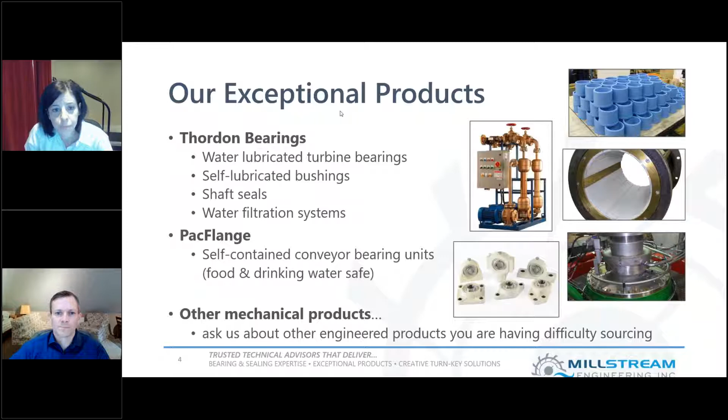Aside from the products we offer, we can also provide different types of engineering support and services to our customers. We are bearing and seal troubleshooting experts, and we love to solve challenging problems. For example, we can help customers figure out why bearings are wearing out too fast or overheating, or help find out why seals are leaking too much. We're pretty good at reverse engineering old mechanical equipment and replacing old components with new ones. Or as Greg says, we love to make old things new and shiny again.

We can also provide machining guidance and support to the shop that's machining the bearings, whether it's the customer's machine shop or a supplier's machine shop. For installation, we can help in person by visiting the site or the machine shop where the bearing or seals are being installed, or we can provide guidance over the phone or written instructions if required.

We also have the capability to do 3D modeling of components and full assemblies, as well as provide 2D drawings. For example, oftentimes we hear from our customers that, say during an overhaul, some of the component drawings were missing. This is where we can come in and offer to measure up these components and make 3D models and 2D drawings for you. And last but not least, we can also do different types of technical reports, schematics, piping diagrams, and any kind of custom engineering report required by our customers.

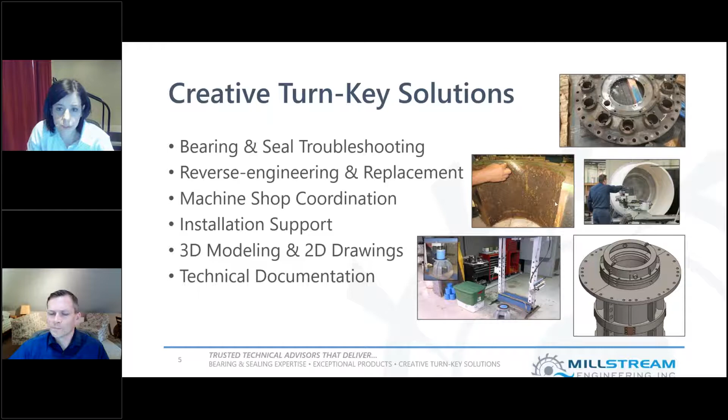So we'll now switch over a bit and talk about some of our most recent work. I'm going to do a couple of slides, and then Greg will take over and do the rest of the presentation.

One of these projects completed earlier this year is the OPG Crystal Falls. This power station is located just west of Sudbury on the Sturgeon River. Unit number 4 was scheduled to undergo some repairs earlier this year, which presented the perfect opportunity to also look at replacing the wicket gate and linkage greased bronze bushings with some new material.

The material we offered was ThorPlas-Blue self-lubricated bearing material, which we supplied in form of rough tubes to OPG Dymond Machine Shop. Our team at Millstream provided the sizing calculations and the engineering support and guidance needed to machine and fit these bearings in place. These bushings were installed successfully, and most importantly, they don't need to be greased anymore.

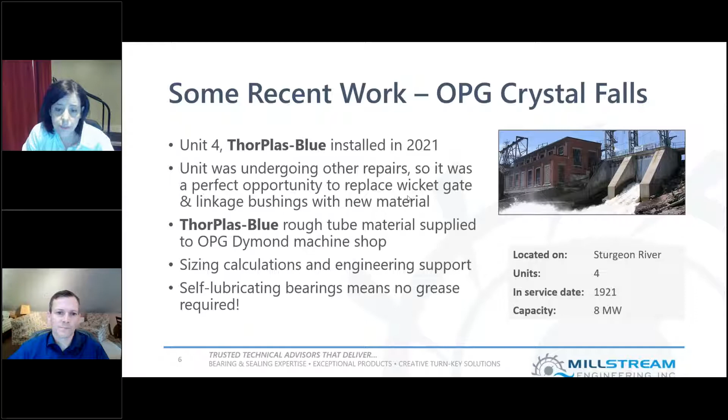The second project done earlier this year was for the DeCew I power station, located on the Niagara River. One of the units was scheduled for a minor overhaul earlier this year, and the overall goal was to eliminate grease and clean up the area.

The old gate linkages in this particular unit were made out of solid bronze, and you can see it in the bottom middle photo there - not the yellow part. The yellow part is actually the lever arm, and where Greg's pointing, that's the solid bronze linkages. These linkages were replaced with stainless steel material by OPG, as shown in the picture at the bottom left.

Thordon supplied the ThorPlas-Blue material, again in form of rough tubes, to OPG along with the bearing sizing, and OPG machined the bushings. Everything reassembled successfully as far as we know in March, and now there's no need to grease these linkages anymore. With that said, I'm going to pass it over to Greg to present the rest of the cases.

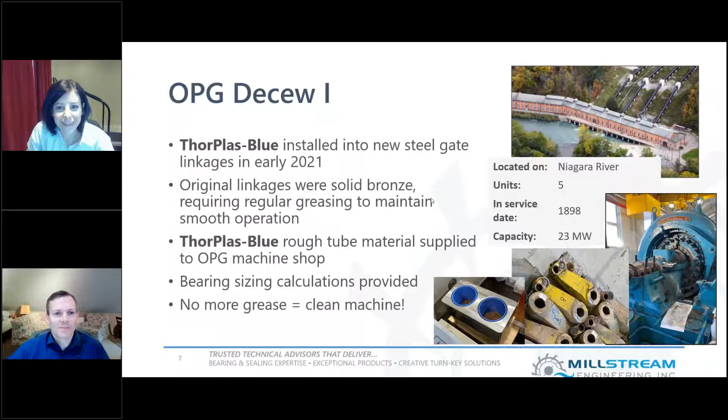Thanks, Alina. I guess the rest of the slides are going to feel a little bit like the OPG show for a couple more slides, but then we'll get on to some other end users as well. The next one I'll talk about is OPG Ear Falls Station.

Ear Falls is in northwestern Ontario, and as with many of our power stations in Ontario, it's pretty old - the units have been around since the 1930s. You can see in the top right corner a cross-section of the original bearing design, which was a stave type bearing, very common in the older units.

You've got staves originally made of wood, and oftentimes they get replaced with different materials over the years, trying to track down the material with the best sort of wear life you can get in that stave type design.

The problem with the stave design in general is that there's a lot of space between the bearing surfaces, so you're not actually getting as good support for the shaft as you could have with a full cylindrical bearing with less of that groove area.

One of the challenges at Ear Falls was that the wear life was relatively short, so the customer was having to make frequent bearing replacements or adjustments to try to keep the clearance as tight as needed. One reason for this, in addition to the material selection of the staves, is that you have open spaces between them where water is going through, which isn't helping to build up a water film to support the shaft as it runs against the bearing.

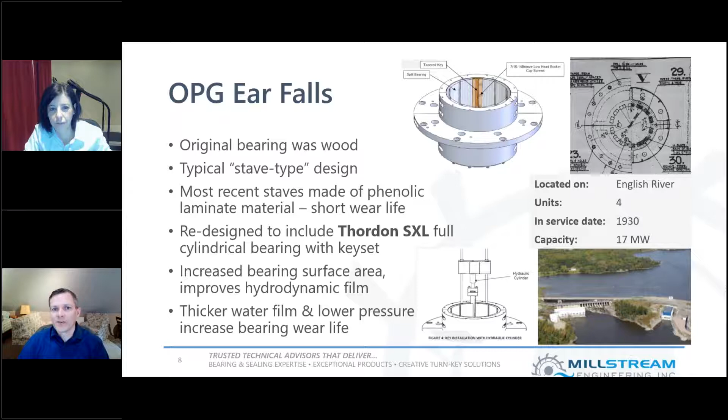The other interesting thing at Ear Falls is that the OPG staff were able to take some vibration measurements of the old bearing previously, before this new bearing was put in. That's looking at the vibration of the shaft at the turbine guide bearing location. The plan is to get back in there and take more measurements later in the summer or fall to have a before and after comparison, looking at vibration as well as the clearance profile in the bearing. So we should have some really good data showing how that bearing has improved performance and hopefully improved the wear life as well. I hope that in a year from now we can update everybody again on this project with a good update on the wear life and better control of vibration in that unit.

So one more OPG project we'll talk about, a little unconventional for Thordon, but it seems to have worked out really well. This is at Lower Notch Generating Station. These are pretty big units on the Montreal River, a lot of water and a lot of power produced. They're definitely newer than the Ear Falls ones, relatively young, put in 1971.

The application here was to use the self-lubricating ThorPlas material as a support pad underneath the generator frame. You have a large generator with a large structure supporting it, which expands and contracts with temperature changes as the unit runs. If you don't allow that support to expand and contract freely, you can have distortion of the generator frame. If you have metallic pads that aren't well lubricated, bronze on steel without grease, or even steel on steel, as the frame tries to expand it's resisted by friction on those support pads, which can create distortion and stresses on the frame being supported. In this case, we supplied through Thordon rough ThorPlas sheets, machined to the same geometry, size and shape as the previous metallic pads, and installed them underneath the generator to give a low friction, self-lubricating surface allowing the whole thing to expand and contract more smoothly without putting extra stress into the frame.

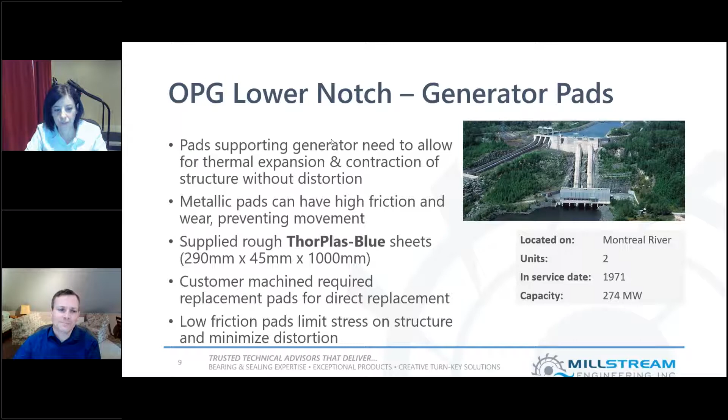Because it's a horizontal application, there are special considerations for the bearing design. We want the best possible hydrodynamic film formation, but we have a constant load from gravity acting on the shaft and runner. Unlike a vertical machine, where the turbine guide bearing is effectively just keeping the shaft centered, in a horizontal machine, even from a standstill, you have to support the weight of the runner and the shaft through that bearing. So it's typical that the bearing itself will be larger, either in diameter or length or both. In this case, the length is probably two times the diameter, which is quite long compared to what you'd see in many vertical turbine bearings. But we also have this smooth bottom feature, the unique Thordon COMPAC style.

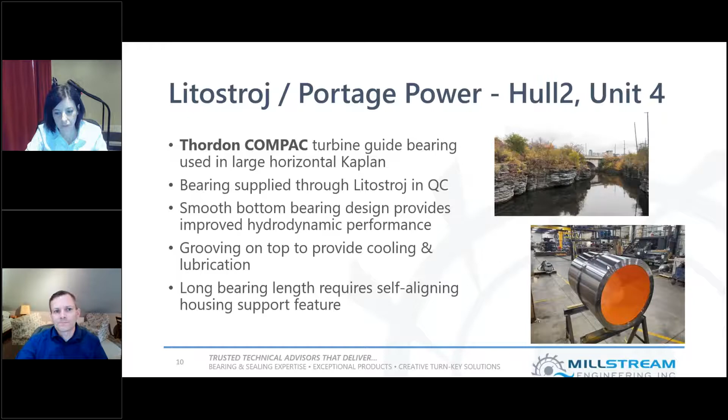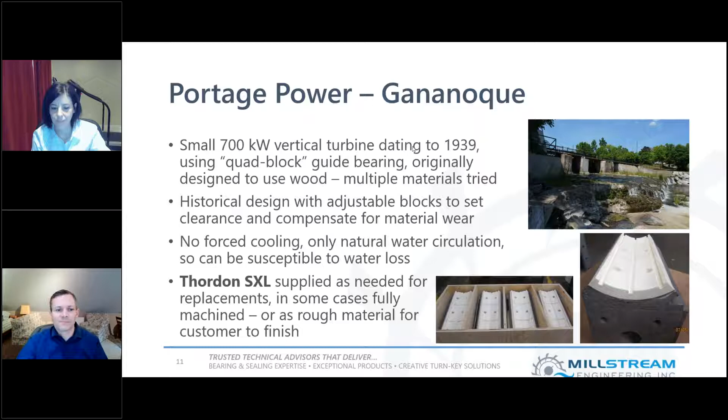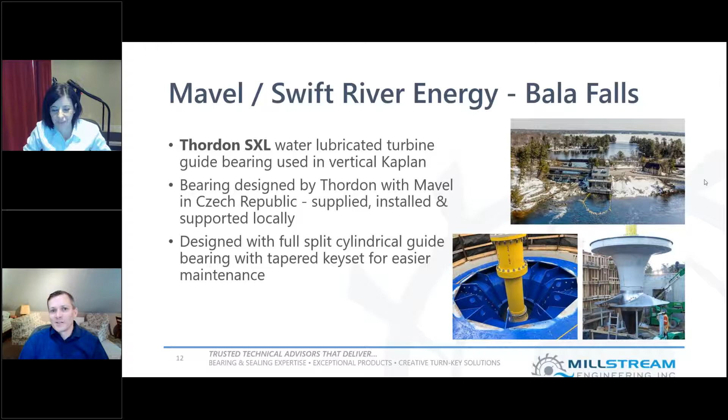So that's been in there now, and as I understand it's running well and has been working fine without any problems since startup. We'll keep an eye on that one since it's 20 minutes up the road from my house, so it's another one that's quite easy for us to help out and support as needed in the future.

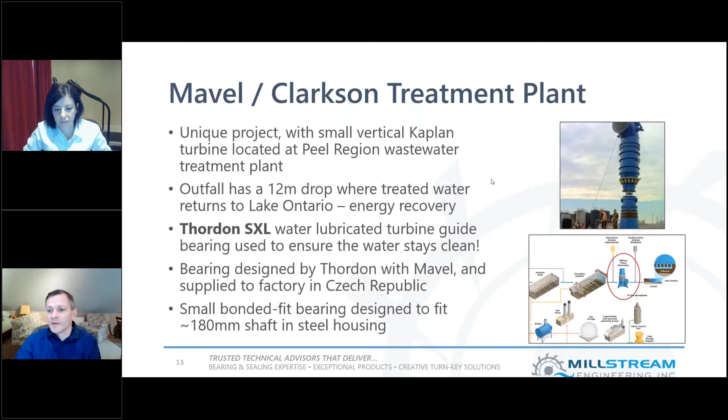The main thing we want to leave with you today is that Alina and I have quite a lot of experience in our company working with all sorts of bearing and bushing applications. So if you're having any kind of trouble with your equipment, your wicket gates, your linkages, any of the regulating mechanism, turbine guide bearings, shaft seals, or any other tricky mechanical challenges or problems, this is the stuff we really love digging into. It's almost silly to say, but it's almost fun to go into really old drawing sets and try to piece together how everything's working and should be working.